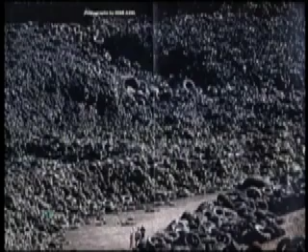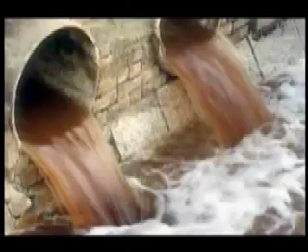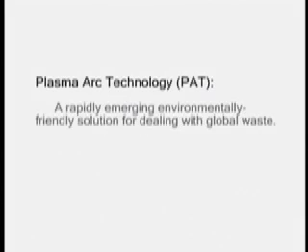Viewer discretion advised. These are some of the global environmental issues that we face today. We at USSTSF have a solution to these issues. US Science and Technology. Plasma arc technology, a rapidly emerging environmentally friendly solution for dealing with global waste.

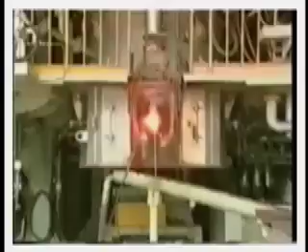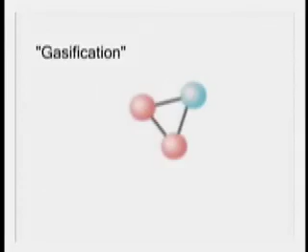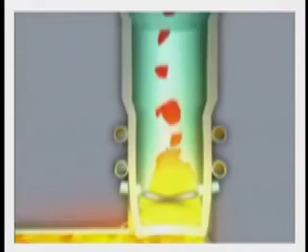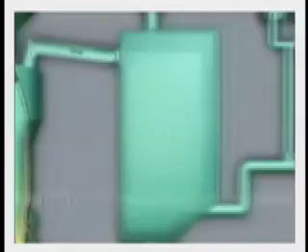A basic law of physics states that matter cannot be created nor destroyed. That is the basic principle behind gasification. The process begins with the use of cheap and abundant feedstocks that are placed into a gasifier under high temperature and/or pressure. Gasification then vaporizes the complex molecules of the feedstock into component parts such as hydrogen and carbon monoxide. The vaporized stream of elements is called synthesis gas and/or syngas.

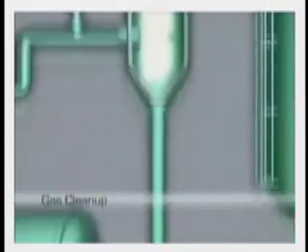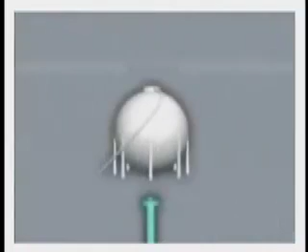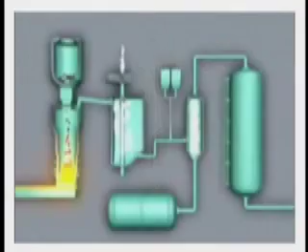Synthesis gas is cleaned by removing the environmentally destructive elements such as sulfur oxides and nitrous oxides that cause acid rain. The carbon dioxide can also be easily captured to reduce greenhouse emissions. With further processing, the syngas will form into a variety of valuable commodities such as hydrogen, diesel fuels, and/or gasoline. The syngas can also be used directly as fuel to produce heat, steam, and electricity. Plasma gasification is the cleanest, most efficient process available to convert low-quality feedstocks into valuable reusable outputs.

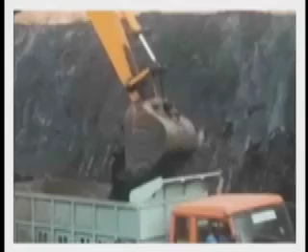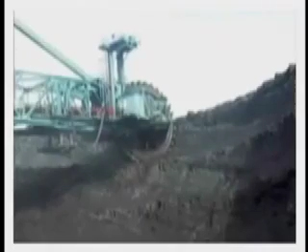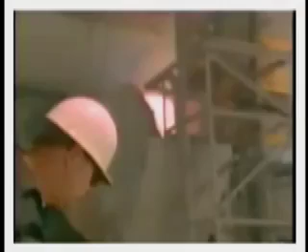Coal is the most abundant energy source on Earth and is relatively cheap to produce, while household and industrial wastes are produced daily. By using feedstocks that are readily available worldwide, plasma arc technology enhances self-sufficiency. Standard gasifiers operate at temperatures of 1600 degrees Celsius, whereas plasma gasification uses electricity and gas flow to create plasma, the fourth state of matter, with temperatures over 5500 degrees Celsius, exceeding temperatures of the surface of the Sun. This emission-free facility is completely enclosed.

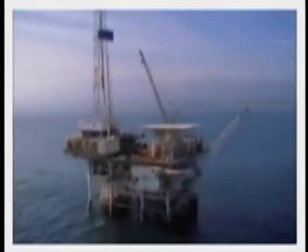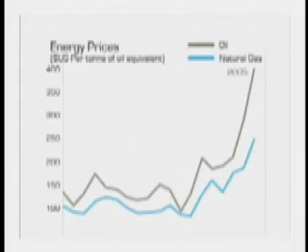Now imagine industrial plants that use many times the magnitude of energy and how this affects them. As conventional energy companies struggle to replace oil and natural gas reserves, plasma gasification will become a necessary part of the energy we use every time we flip on the light switch. Natural gas and crude oil prices have been increasing for many years and are still in a constant state of flux. As a consumer, we see examples of this every day at the gas pump and when we receive our monthly electricity bill.

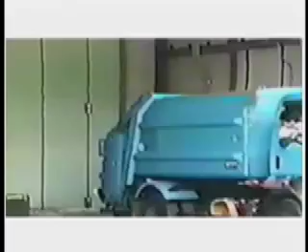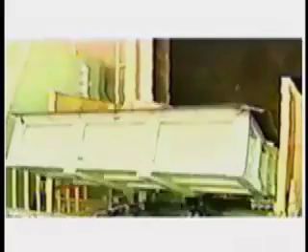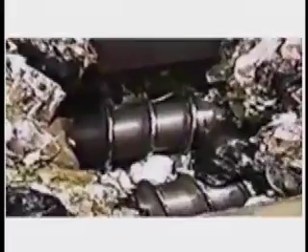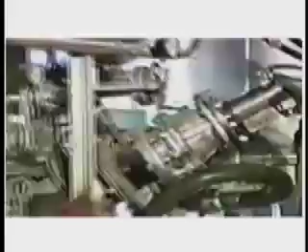Let us introduce the equipment and the system. The waste is brought to the facility. General waste is put into the pit from the platform, and other waste from the dumping box is also added. This waste is dropped into the hopper by crane. This deposited waste is pushed into a furnace along with a small amount of coke and limestone. This waste is pyrolyzed by heat from a plasma torch. At this state, it is being melted and gasified.

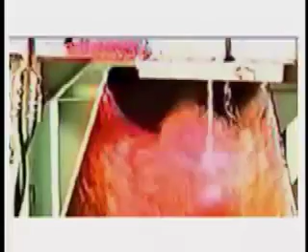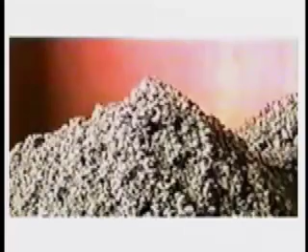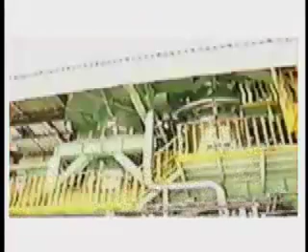Molten matter dispenses from the tap hole, traveling through the coke. The molten slag is deposited into water for quick quenching, reducing it into grains of approximately 1 millimeter in size. This is called slag. The volume reduction from the original waste volume is approximately 1/100. The exhaust gas is combusted completely at the secondary combustion chamber to produce energy. Combustion temperature is generally 1000 degrees Celsius, and residence time is over 2.5 seconds. The high temperature decomposes dioxins and furans.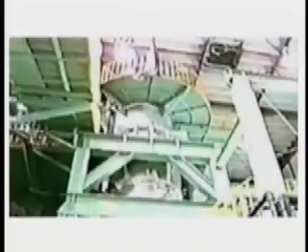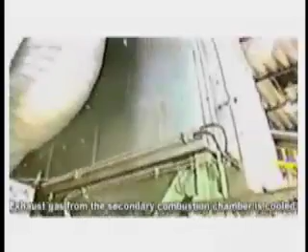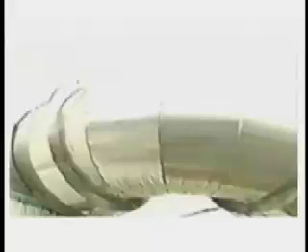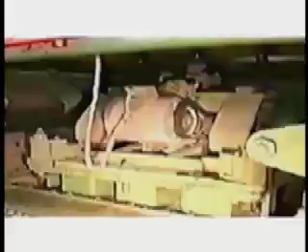Exhaust gas from the secondary combustion chamber is cooled. Hydrogen chloride and sulfur oxide are taken from the exhaust. The clean gas is exhausted from the stack. The slag locks up harmful heavy metals without depositing them into the environment. Landfilling with the slag will not pollute its soil. The slag is appropriate for interlocking block for parks and residential roadways, building material, and other broad range of usage in the future.

Clearly, plasma gasification provides a timeless solution, and one with a much smaller environmental footprint than landfills or incineration. We all share the responsibility to maintain and preserve the environment. U.S. Science and Technology is determined to provide global, innovative solutions. Plasma gasification is the next generation of technology.